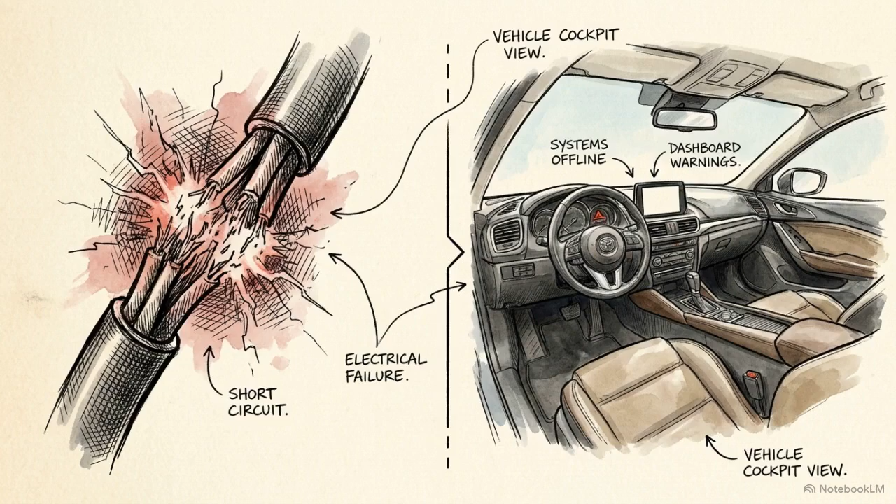Safety engineering used to be about fixing broken things, severed wires, or microchip failures. This split screen shows the shift. On the left, a traditional hardware short. On the right, a system accurately processing its environment while its driver is completely distracted. This right-hand scenario is the new crisis in vehicle automation.

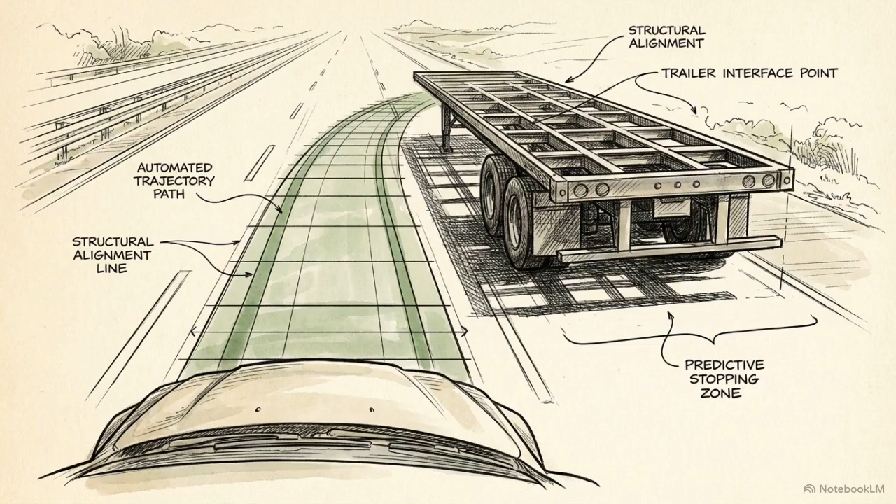For years, the industry relied on the ISO 26262 standard to mitigate electrical and electronic failures. It is highly effective at ensuring physical components and software code operate according to their technical specifications. However, modern accidents frequently occur when systems operate exactly as programmed. These hazards emerge from the functional limitations of sensors and the inevitable gaps in how humans interact with them. ISO 21448, known as SOTIF, or the safety of the intended functionality, was developed to address these specific risks.

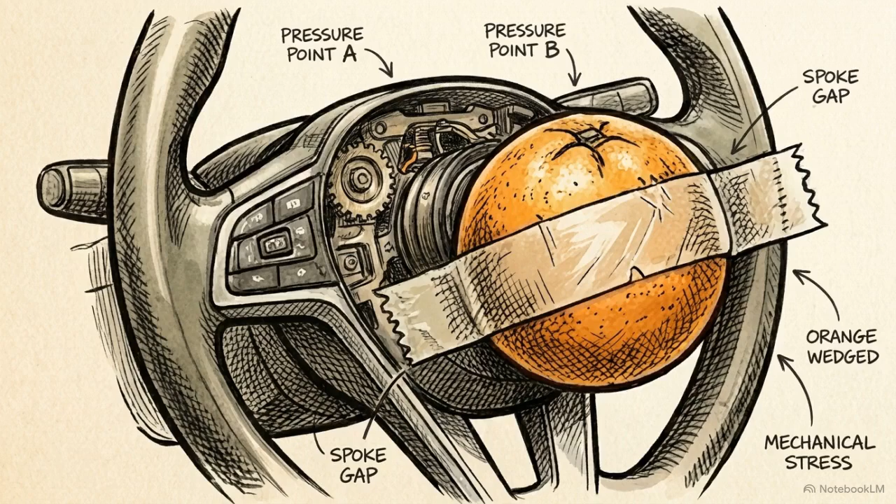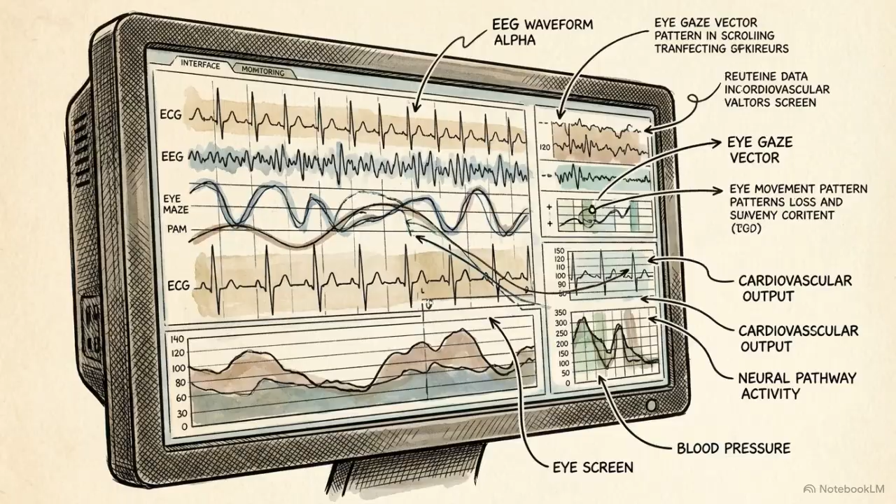SOTIF requires manufacturers to engineer against reasonably foreseeable misuse. Success now depends on modeling human unpredictability and building technical defenses to contain it. Human behavior is no longer an external variable. It is a core functional safety parameter. The vehicle must be designed to actively supervise the driver's attention.

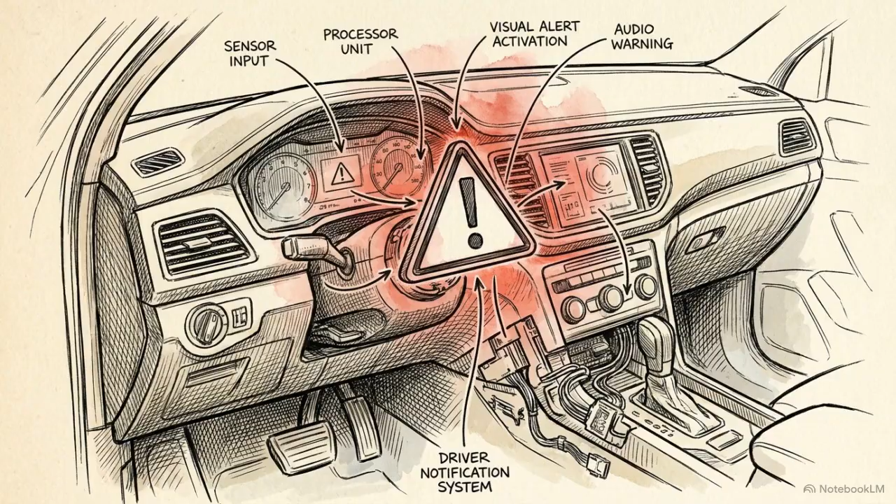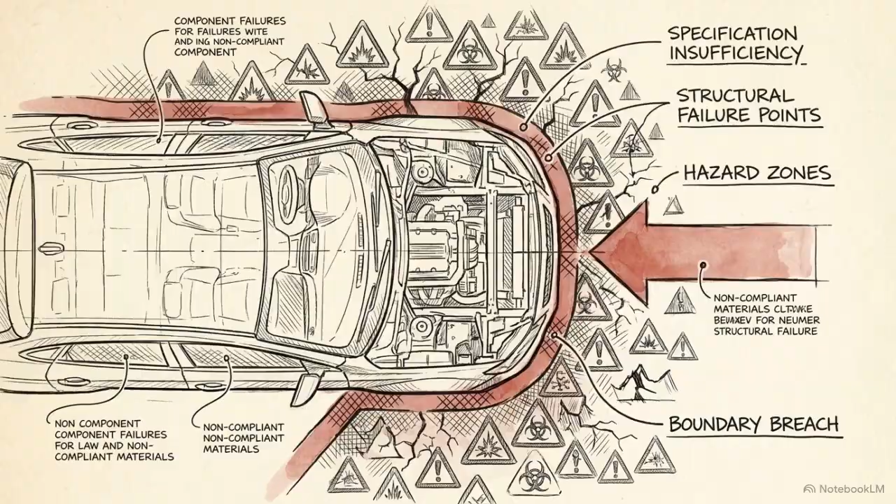Indirect misuse is more difficult to detect. It occurs when a driver fails to regain control after a system reaches a functional limit, often because they have stopped acting as an effective supervisor.

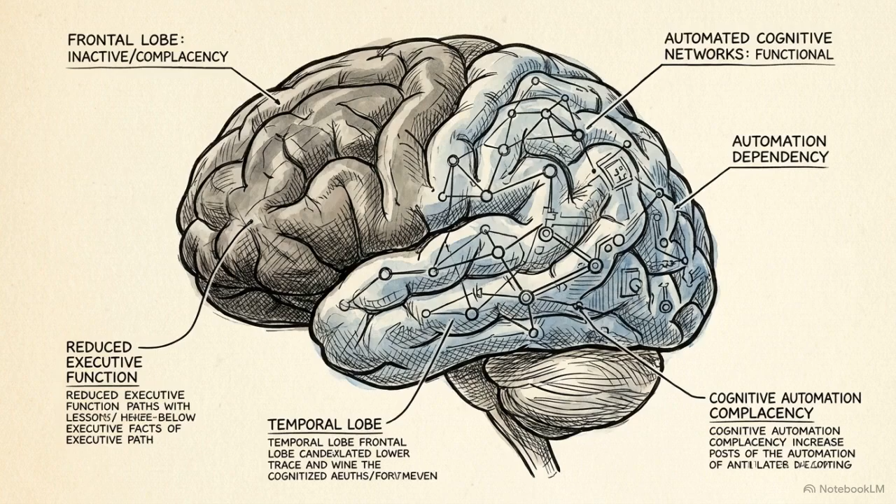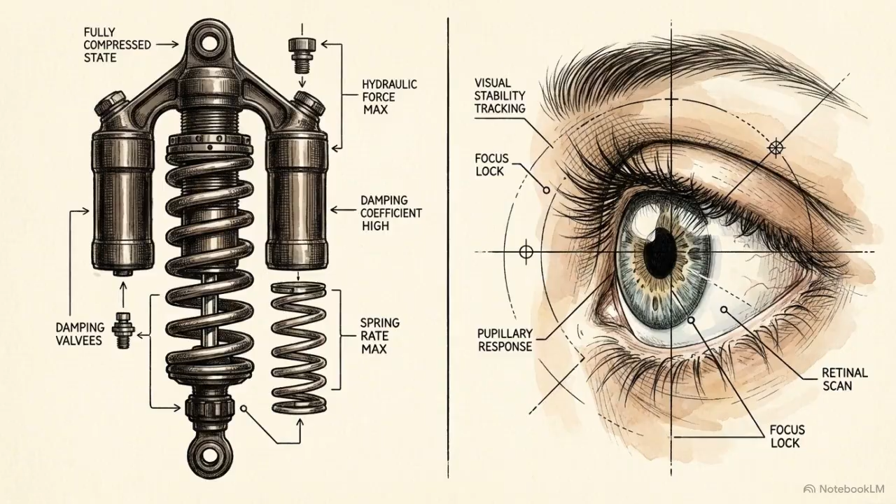These psychological theories are validated by the data found in National Transportation Safety Board collision reports. These investigations provide a roadmap of how faultless engineering can still result in a fatal crash. Consider the Uber ATG crash in Tempe, Arizona. NTSB investigators found the safety driver had been streaming a television show on their phone for several minutes leading up to the fatal impact. This crash illustrates SOTIF root cause 3, learned carelessness. The system's reliable performance over hundreds of hours had conditioned the human to assume their supervision was no longer necessary.

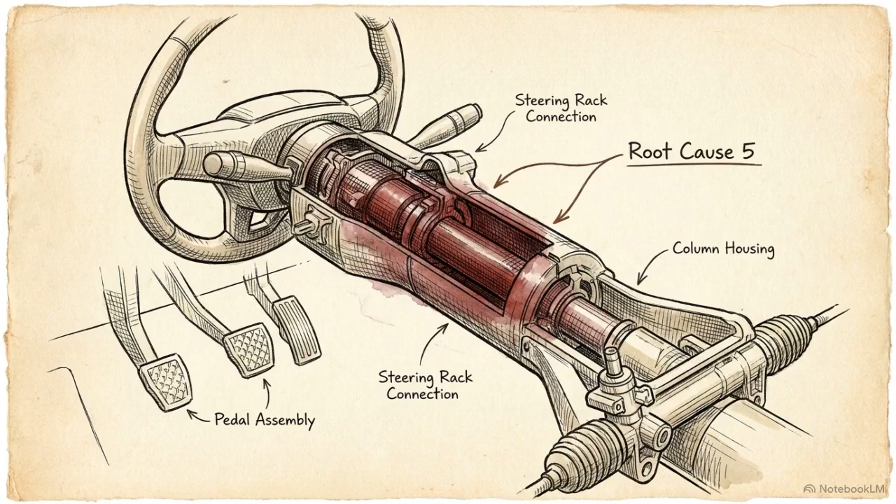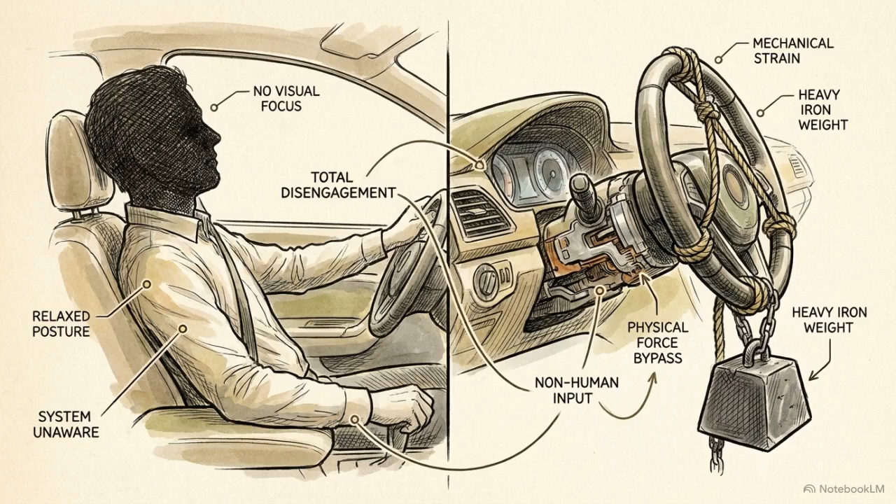In another collision involving a Tesla Model X, the NTSB determined the driver was actively playing a smartphone game while the vehicle was in motion. This crash exposed a specific failure in root cause 5, an incorrect assumption regarding how a user would interact with the safety sensors. The car used a torque-based steering sensor, which misinterpreted the weight of a resting hand as active supervision. Under SOTIF, relying on a physical force as a proxy for visual attention is an engineering insufficiency.

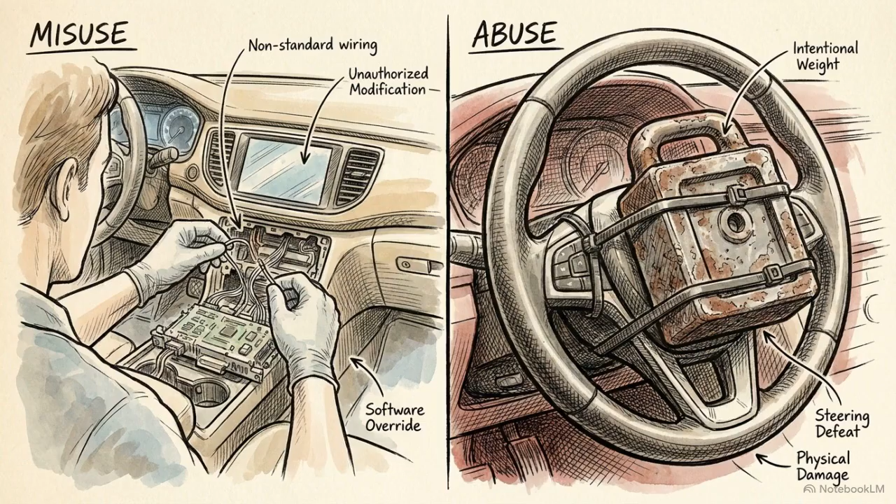ISO 21448 Table 5 provides the toolkit for identifying these specific scenarios before they result in a crash. Method A involves internet media analysis. Engineers scrape platforms like YouTube and Reddit for hacks or defeat devices. A viral video showing how to trick a torque sensor creates a new functional requirement for the vehicle's design team.

Method F uses human behavior modeling and cognitive architectures to calculate real-world response times. These models predict exactly how long a distracted driver takes to process a takeover request and physically resume control. By setting the boundary of liability at what is reasonably foreseeable, SOTIF removes the ability of manufacturers to blame user error for predictable design flaws.

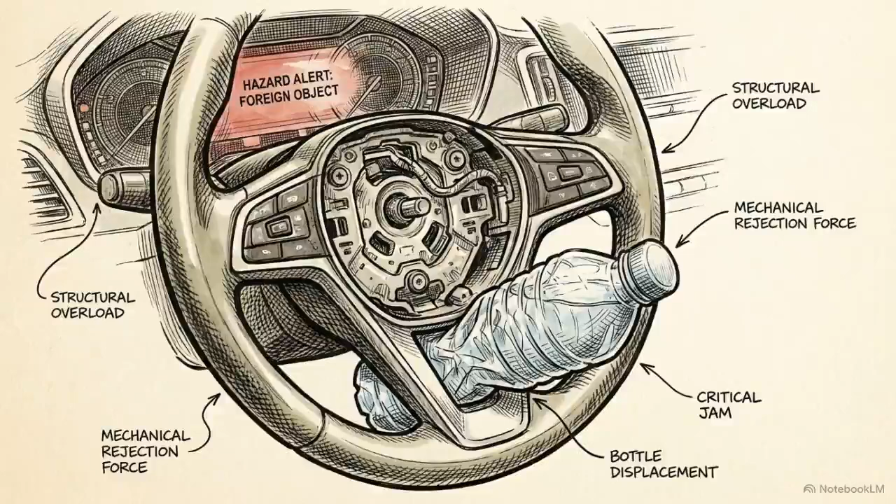Mitigating these risks requires a complete hardware transition. For 2025, the primary safety focus is moving from the steering wheel to the cabin interior. Capacitive hands-on detection is replacing torque sensors. By measuring electrical capacitance instead of physical force, the system requires actual skin contact. This prevents users from using inanimate objects to trick the car.

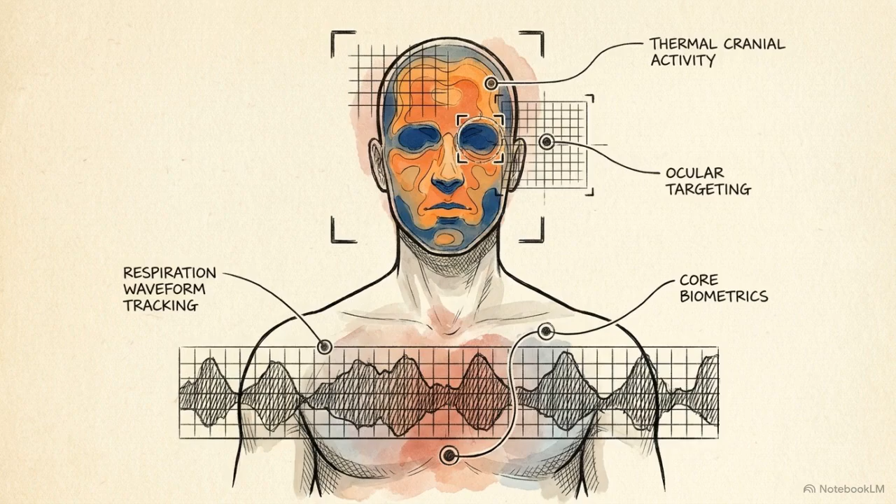Manufacturers are also deploying DMS 2.0, utilizing 60 GHz radar and infrared cameras to monitor the driver's biological state. These systems track gaze and respiration to identify cognitive load. The car can detect if a driver has physically looked at a hazard but failed to cognitively process it, providing a warning before a collision becomes inevitable.

Computing the driver's internal readiness is now as vital to safety as mapping the road. If the car detects a non-responsive driver, it initiates a minimum risk maneuver. It autonomously activates its hazards, slows down, and moves to a safe stop on the shoulder or within the lane.

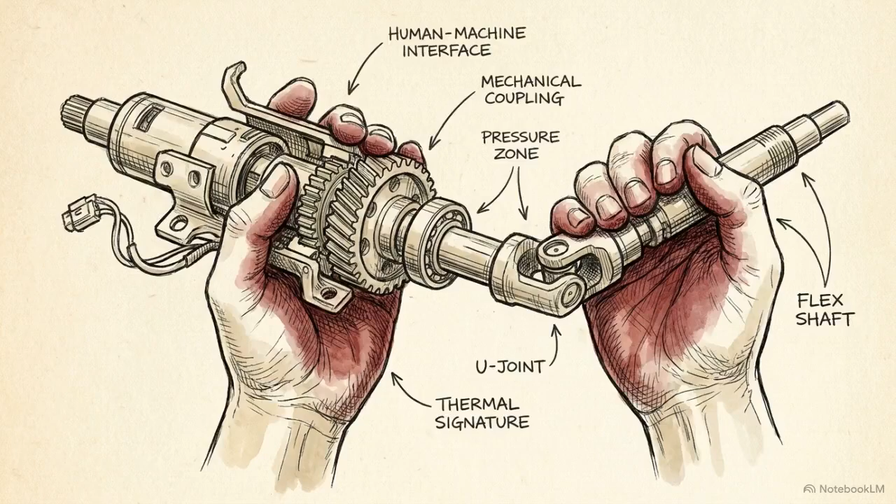This highlights the automation paradox. As systems become more reliable, the design of the interface between the machine and the human becomes the most critical point of failure. SOTIF confirms that the ultimate challenge of autonomous driving is the mathematical containment of human nature.